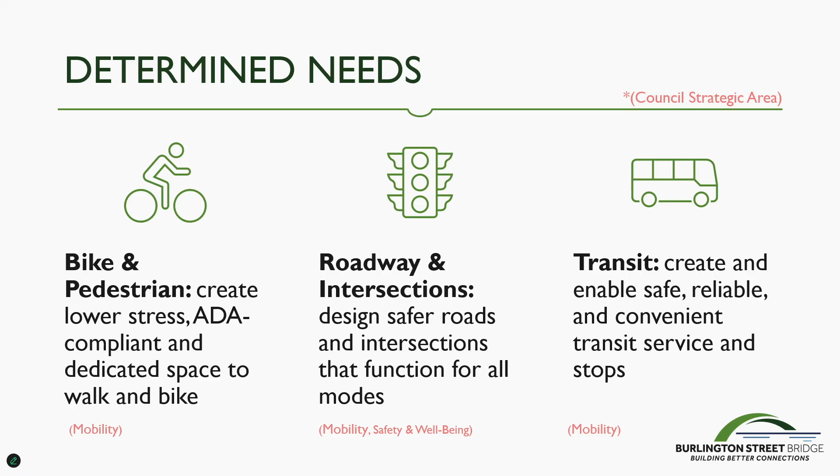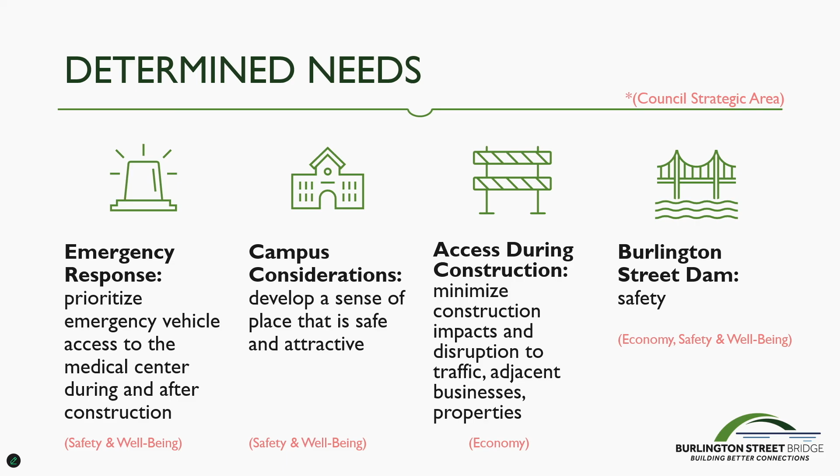For emergency response, we prioritized emergency vehicle access to the medical center during and after construction. Then developing a sense of place that is safe and attractive, minimizing construction impacts and disruptions to traffic, adjacent businesses, and properties. For the Burlington Street Dam, the primary focus and need was safety.

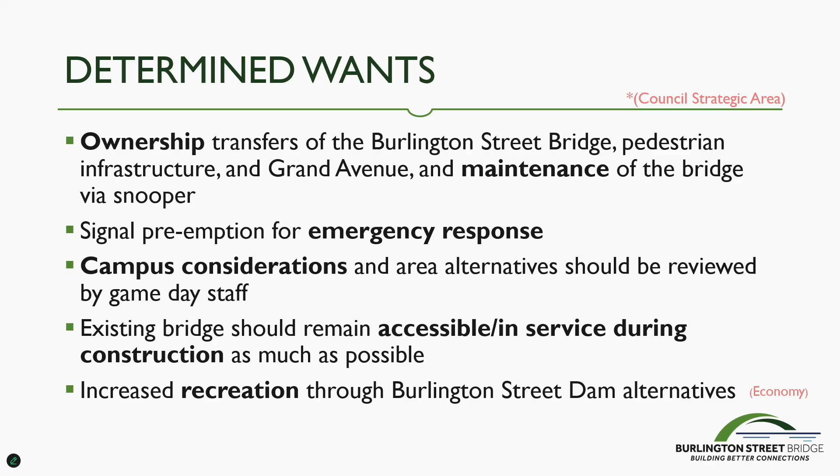Then for some of the wants: ownership, looking at design that would accommodate specific maintenance equipment, emergency service preemption at some intersections, having game day staff as part of the reviewers, having the Burlington Street Bridge accessible at all times, and looking at recreation through the Burlington Street Dam.

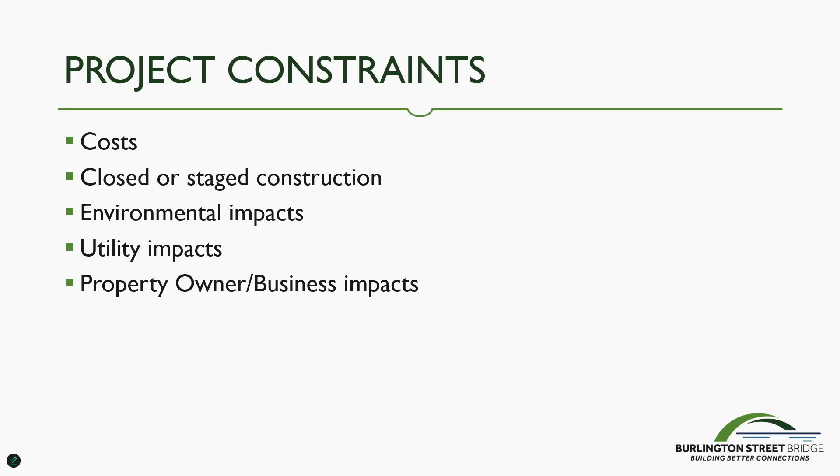And then, as always, some project constraints: cost, I think with every single project; looking at constructability, staged or closed construction for the bridge; environmental impacts; utility impacts; and property owner impacts. So it's a lot of information, a lot of needs.

So how do we advance into actual alternative development? We take all feasible opportunities within the region, then compare that with the technical feasibility from a design perspective, using state standards and current design standards, filtering out initially what won't work for the area. Then we take that and compare it against the project needs and filter out again. If it doesn't meet the project needs, it wouldn't get carried forward.

So out of the things that do meet the project needs, checking all the boxes, we meet with our advisory committee and discuss the positives and negatives of each alternative. The ones that had the greatest benefit were advanced. So that's where we are here, into our concept alternatives. We've already pre-filtered all of this to what is feasible and what meets the project needs.

Taking a closer look at each of these areas, we've divided this into 4 key areas. This allows us to take more of a bite-sized look. There are many different options that can be mixed and matched. We'll take you through every one of these 4 different areas in detail, starting with the first area, the Burlington Street Bridge. And I will hand it off to Jeff Morrow with Anderson Bogert.

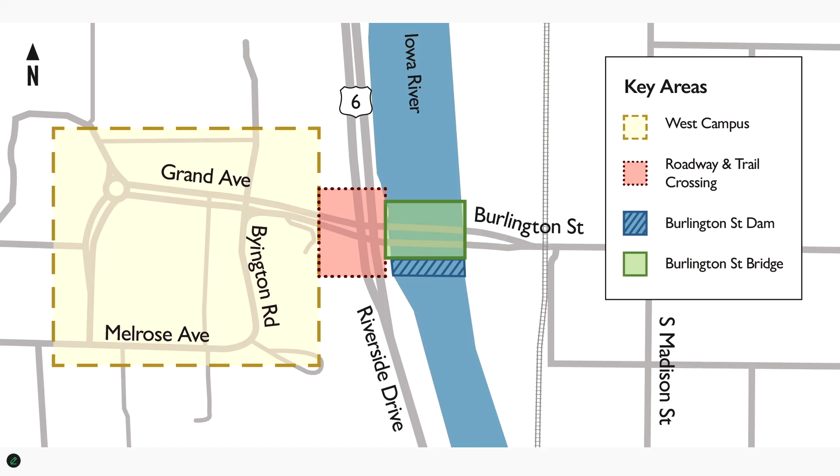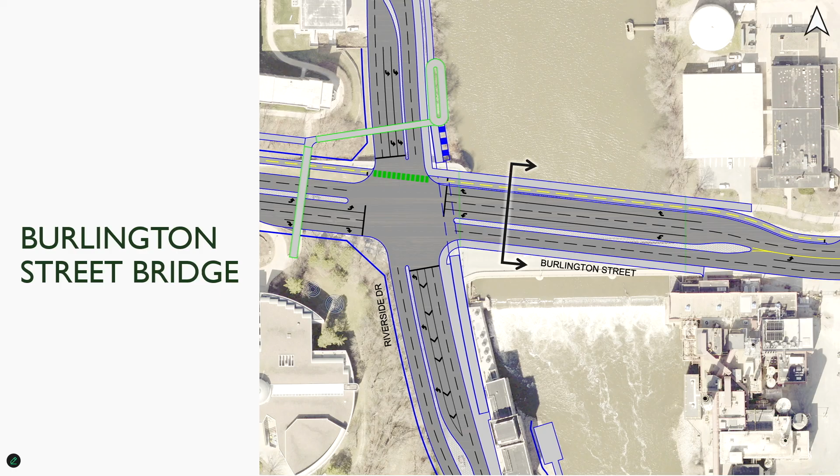All right, let's talk about bridges. This first slide is sort of an aerial view, like you're a bird looking down on Burlington Street Bridge. You can see this heavy line here, like we're going to take a big slice with a giant knife and cut that bridge and look at it on end. We'll be looking in the direction of the arrows, which is east.

So, as I said, we're looking at the bridge. The vehicles going away from you into the screen are going eastbound towards downtown, and the vehicles coming at you are going westbound toward the hospital. There's a median dividing traffic. All of the options have the same traffic lane arrangement for the vehicles.

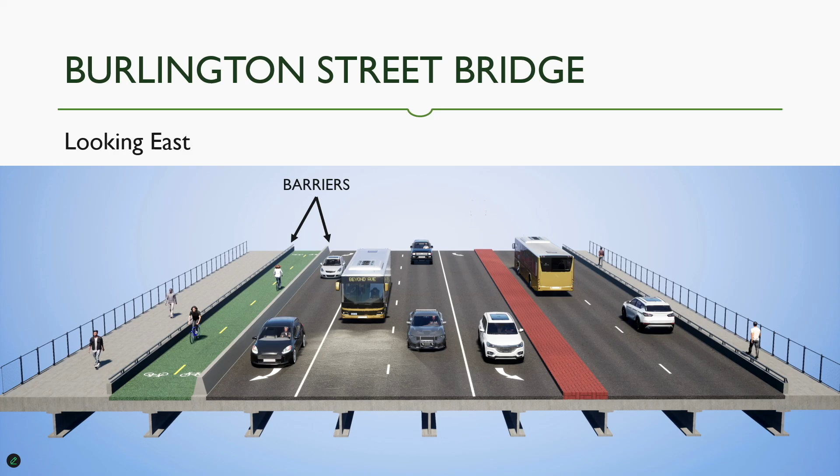That's going to be like, what, 1% of the time. 99% of the time, it's just going to operate as a bikeway and a pedestrian way. And then this option here just has very separated barriers between the three different modes of travel we've looked at. The pedestrians are separated from the bikes, which are separated from the cars.

And what that does is a couple things. One, it helps with these left turns so they can turn at the same time. Like today, you feel like you're going to run into the opposing traffic, so we're trying to fix that. We're also adding some more storage in the turn lanes because sometimes those kind of run out of storage. They fill up with cars or they get blocked.

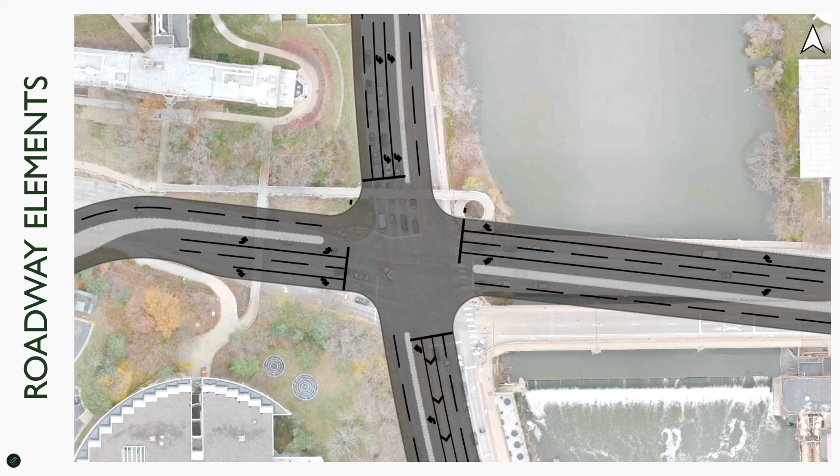We are moving Riverside over to the west to provide some more space between the river and the roadway, because we need space for pedestrians, a trail, and so forth.

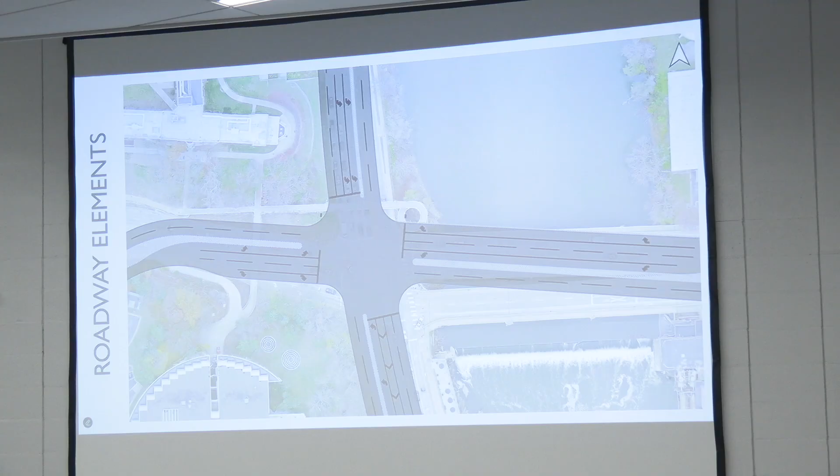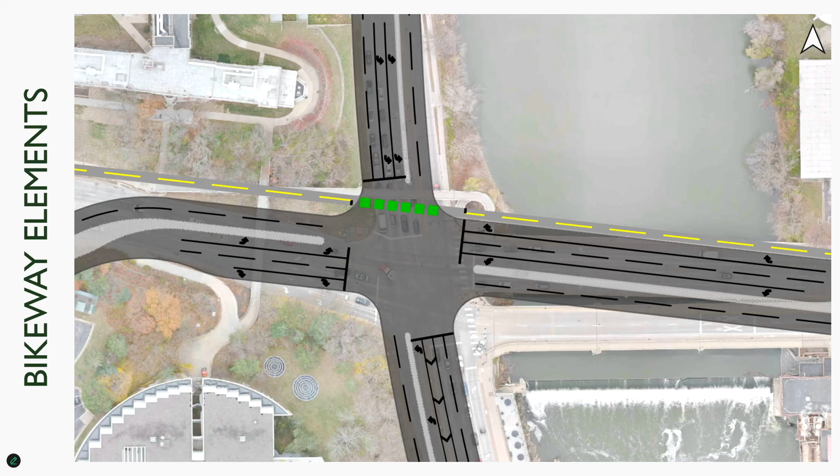So let's just add on the bicycle way. That's that same two-way bicycle way we talked about on the north side. These bicycles, if you're going east-west, will continue through the traffic signal across Riverside. They will also have the option to continue north or south on the trail along the east side of Riverside.

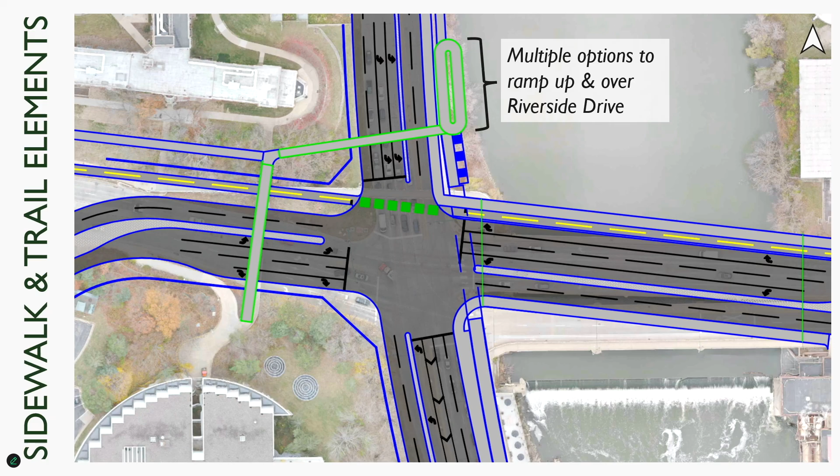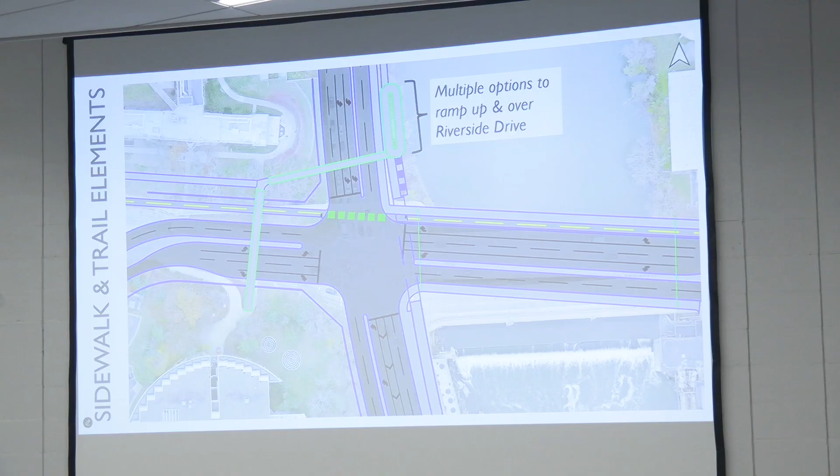And then we throw in the pedestrians, and this is where it gets pretty busy. For pedestrians, we're still looking at a very similar arrangement, crossing Riverside with an overpass and crossing Grand with an overpass, like you do today. We'll talk about some more of these different crossings, but we're going to focus on ways to get up to these overpasses in these next few slides.

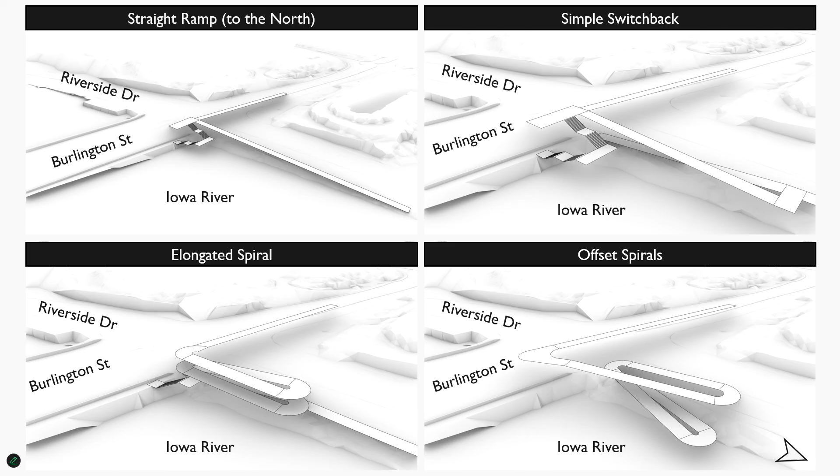So we looked at 4 options, and I'll go through each one in more detail. We've got just a long ramp that goes north. You're kind of looking southwest, so the river's here, campuses or the dorms are up here, hospitals up here. So you're looking at a long ramp that goes on the north on Riverside.

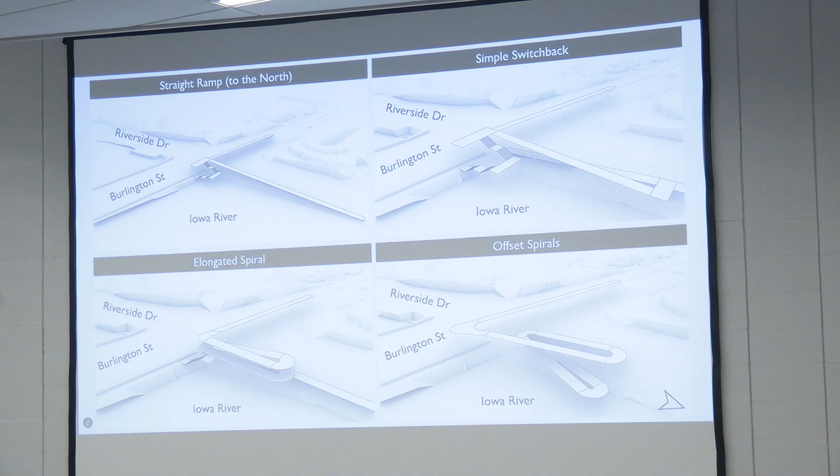We also looked at a switchback ramp, so still the same length of ramp, but just doubling back on itself. And then spirals, kind of like what you have today, except the spirals that are out there today are not compliant with the Americans with Disabilities Act. So these would stretch out that spiral and get you those more gentle slopes.

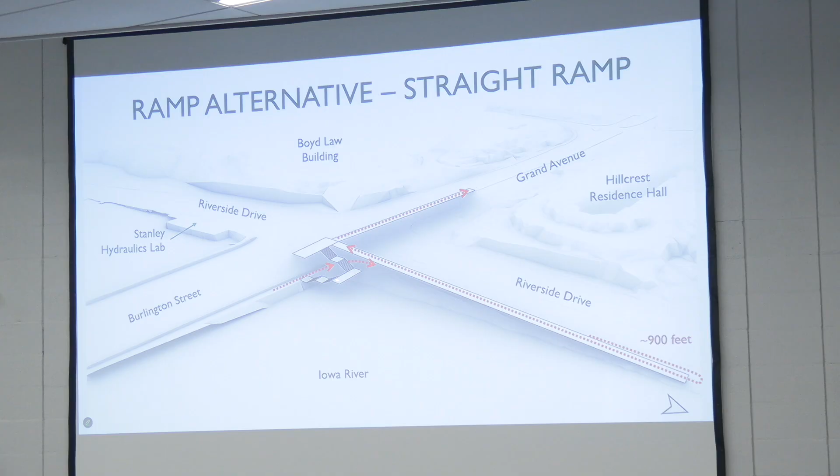So let's look at that first one, the big long ramp. If you are traveling on the north side of the bridge, Burlington Street, and you want to cross Riverside Drive, if you're able, there would be some sort of stairway to get up, and then you would go across just like you do today. Or if you need ADA accessibility, you would just be at grade, you'd take a right, you'd walk on the sidewalk along Riverside about 450 feet, then make a U-turn and go another 450 feet up and then cross.

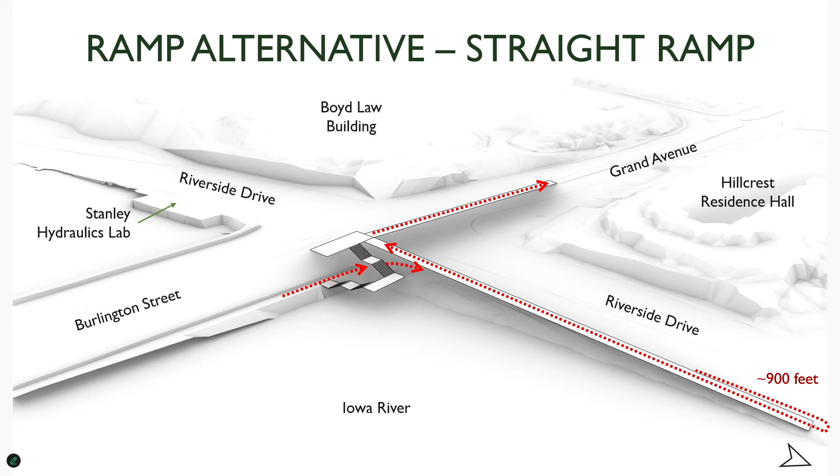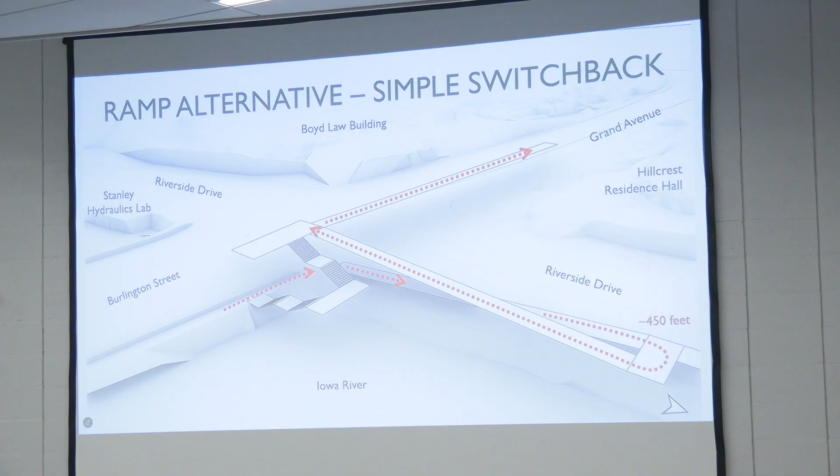So that's where that 900 feet is, it's 450 feet each way. 450 feet is about a long block on a street, so in a neighborhood. So then we look at the folded ramp, and the advantage of this is it cuts the distance in half. You're just doing the ramp up and making that U-turn, so you're just doing 225 and 225 and you're up. Same thing, if you're able, you can use the stairs and get up and cross.

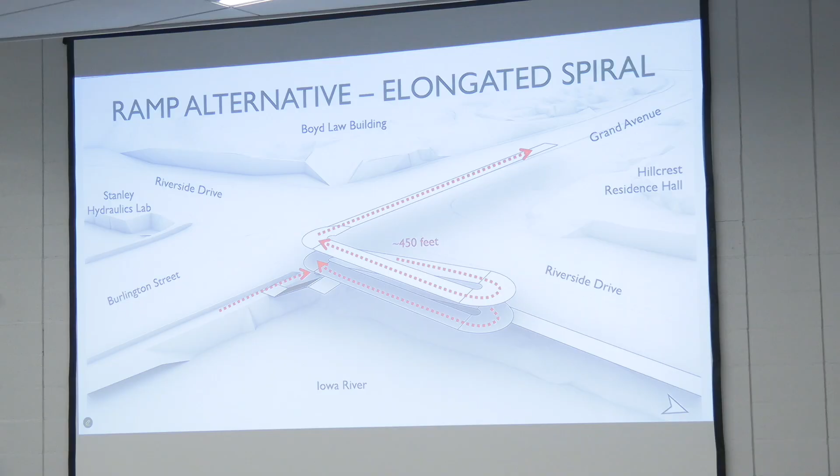Then we've got the spiral, which again, you've got that today, except this is compliant. We may have some stairs that'll get you partway or all the way up to the top. Or if you need that ADA accessibility, you just get on the bottom of that ramp and you take 2 revolutions to get all the way up, and then you go across.

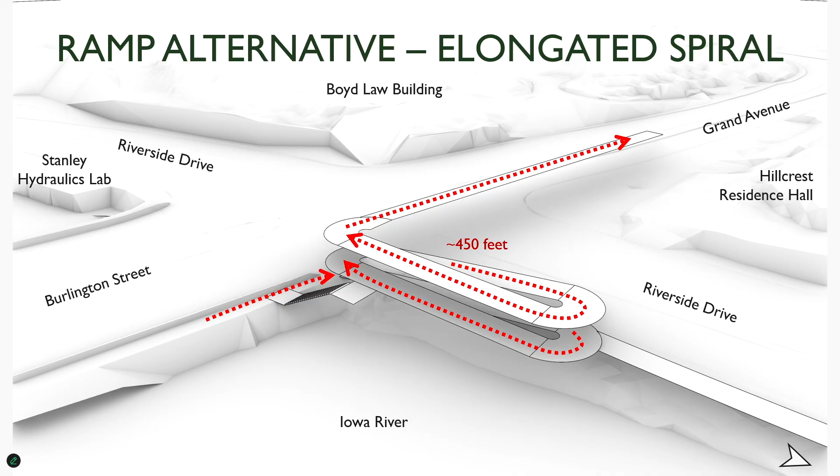Last one, this is what's called an offset spiral. Same idea as a spiral, it just has some different directions on it. This gives you opportunities for better views, and kind of gives you the impression you're not really going as far. It's still the same distance, 450 feet like the other 2, 3, and 4, but it gives you different perspectives as you're coming up — a view over the river and then back, and then maybe a view down along the trail and back up.

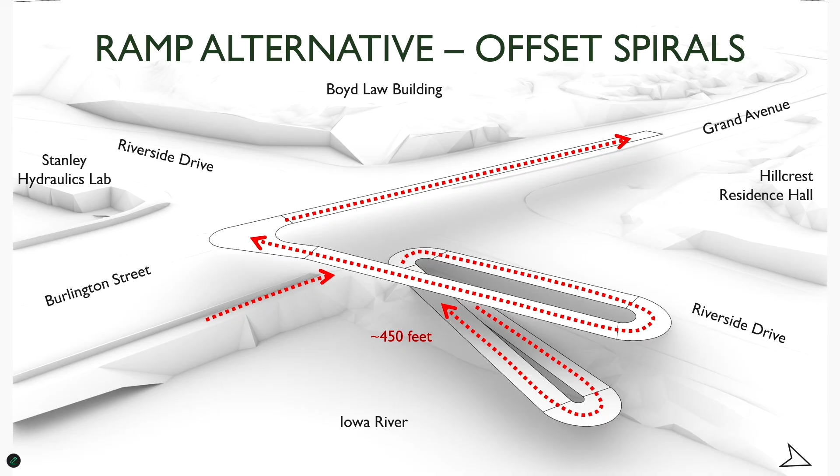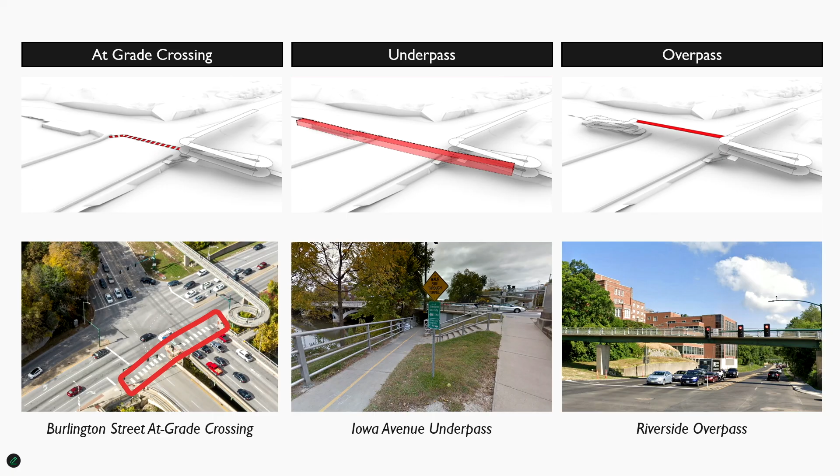All right, so that's how we get across Riverside. Let's talk about crossing Burlington Street. There's basically 3 options that we looked at. The first one is at grade. That's what you have today. There's a crosswalk, you cross with the signal. And then we're showing that elongated spiral, but essentially the same concept as what we have today.

The other way is to put an underpass underneath Burlington Street. So it would be like what you have at Iowa Avenue. Again, not an unusual concept.

It is here. And then the third one would be an overpass. We talked about all the different ways you can get up. We would do that on one side, go across, overhead. And then probably on this side, since we're more constrained for space, it probably would be a spiral that's more compact, but it wouldn't have to be. So those are the different crossings.

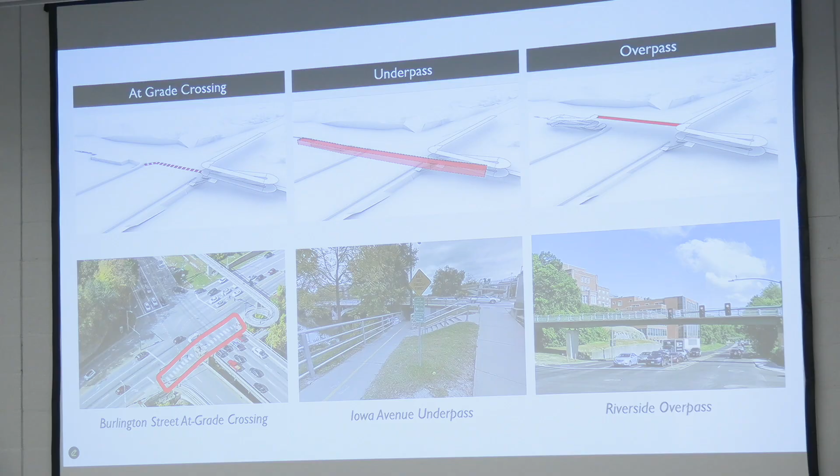I think with that, we're going to start looking at West Campus alternatives with Jacob Weiss. Thank you.

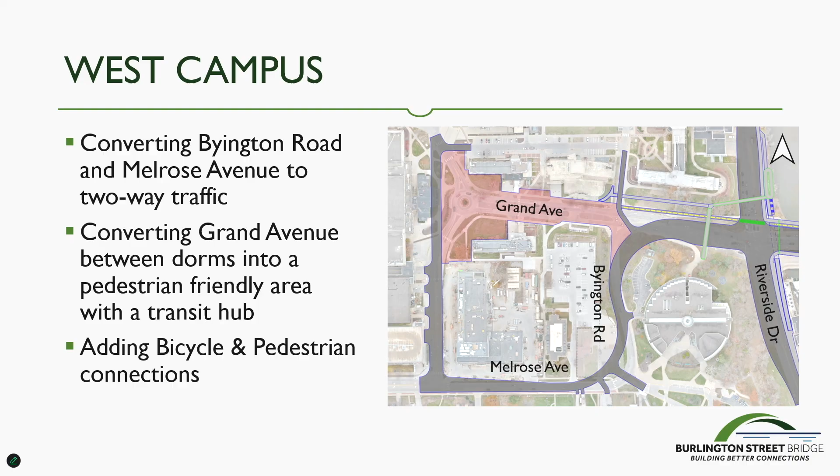All right, so Jeff went over everything, kind of the east, both the bridge and the intersection with Riverside. We're going to head a little bit further west. You can still kind of see some of those crossing options that Jeff was mentioning earlier, kind of on the right side of the figure there. But for West Campus, we want to talk about 3 main bullets, and I have some slides that break down these 3 bullets. The first is converting Byington Road and Melrose Ave to 2-way traffic. The second is converting Grand Ave to a pedestrian-friendly area between the dorms there, with a transit hub and some amenities for students to get safely on and off the bus. And then lastly, adding some bicycle and pedestrian connections. I'll break these down in the next few slides.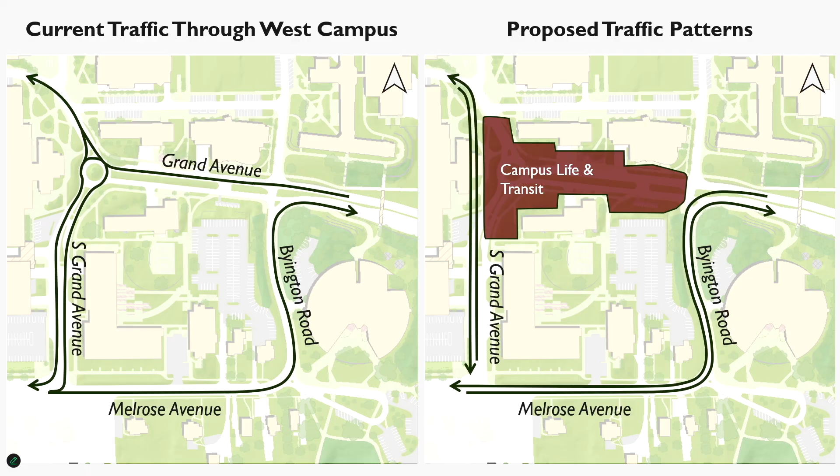You kind of see in the red area that we talk about that campus life and that transit area. That would also provide access for the existing dorm facilities to get shipments, so we have specific times for folks to pick up and drop off things that need to be delivered to those dorms as well. Here's that in CAD.

So essentially, we're showing the 2-way Byington Melrose. Again, that's what you see with those 2 arrows. We're still determining the number of lanes for that, but we have a board over here with some more details that I can talk to you about after this presentation if you want to dive into what options we're considering.

In that red area along Grand Ave, that gives us the opportunity to have more of a pedestrian mall, right? We'd have opportunities for students to walk wherever they want to in that area because there isn't a ton of traffic going through there anymore. They can walk to the bus stop, get off the bus, or have different amenities throughout that Grand Ave kind of pedestrian-friendly area.

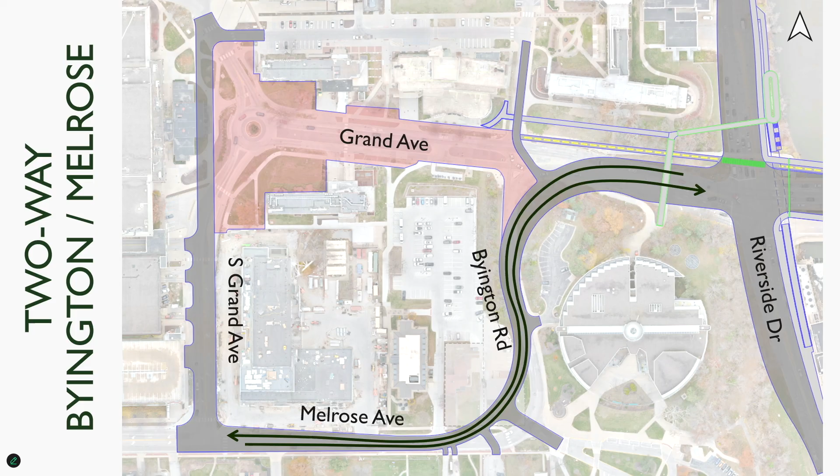In terms of transit hub considerations, there are a lot of options we've looked through, but the main two we're leaning towards - there can always be others that pop up as we continue through these early planning stages. Essentially, the buses would follow the two-way Byington/Melrose traffic, get over to South Grand, head up to that pedestrian mall area, pick up and drop off students, head back to Melrose, and then head on their way. So those buses would follow the arrows I've drawn along Byington and Melrose.

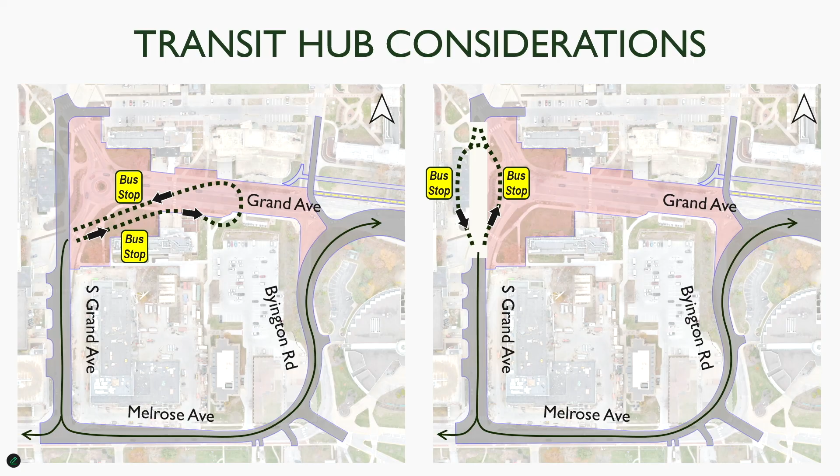The couple options we have along Grand Ave: we could orient the buses east-west to be picked up in that pedestrian-friendly space, or we could keep them on South Grand and make a larger roundabout radial movement for the buses to come up, loop around, and head back south. We're still determining what would be best, and we'd love to hear your input at the board after the presentation.

And lastly, bike and ped connections. We know today those bike lanes that go across the bridge stop at Riverside, and then you're stuck in with traffic. Jeff mentioned we are looking at a two-way bikeway on the north side of Burlington, which would stay on the north side along Grand Ave.

Once we get to the Byington connection, that's where we would determine whether we go Route A, Route B, or both. Route A would get students to their dorms or maybe bike parking. Route B could be for folks traveling through the campus area. We're still determining the best route for those bikes, but we definitely want to include and remove any gaps in the bike system through West Campus.

Everybody in the law building would go across the overpass, correct? That is the plan.

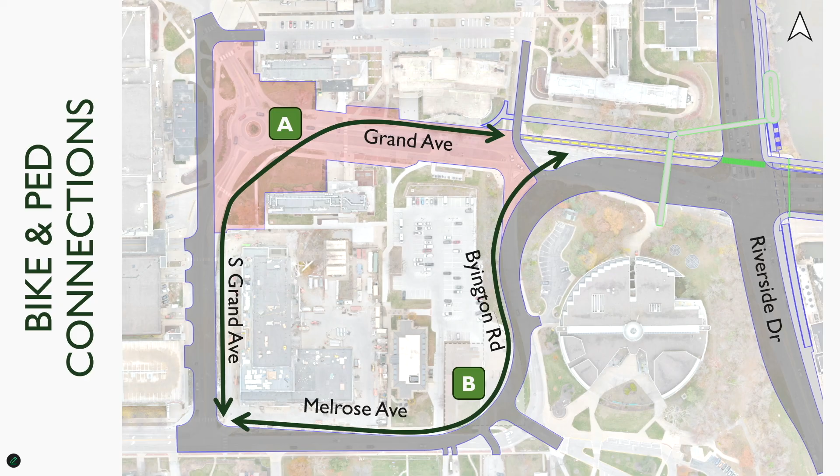We're also looking at some potential crossings on Melrose or Byington. We're still determining that.

And lastly, I'm going to drop it off to Mike for the dam alternatives. Thank you, Jake. So some of the Burlington Street dam alternatives that were advanced, at a minimum, would include improved ability for river recovery. All the options would enhance what's there today. Since it doesn't quite exist today, it's difficult to get to, so we would improve that ability for river recovery.

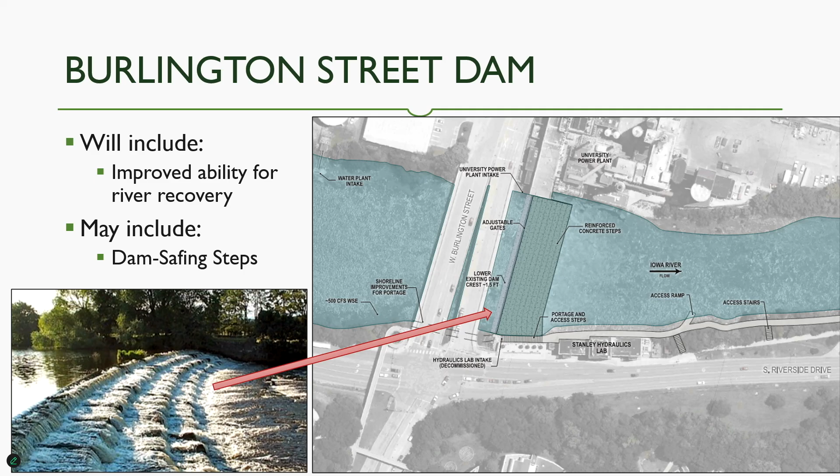Some of the options that might be included moving forward with our alternatives is extra dam safing. One option shown here is dam safing steps that remove the current at the current roller dam, so if you go over, it's not fatal.

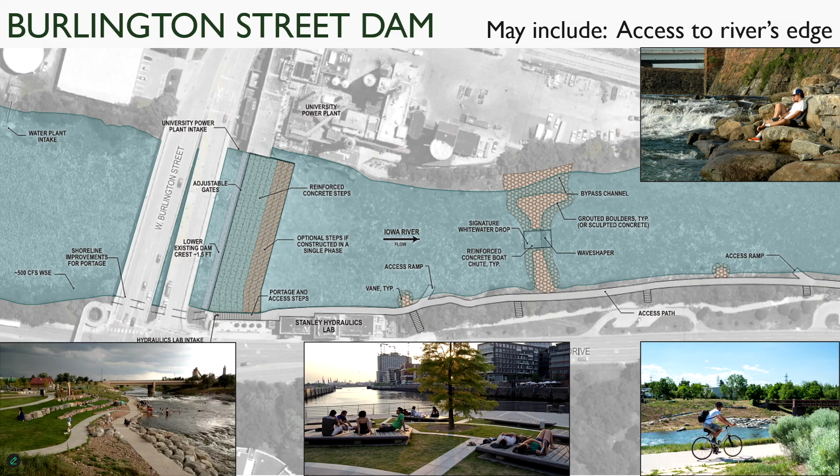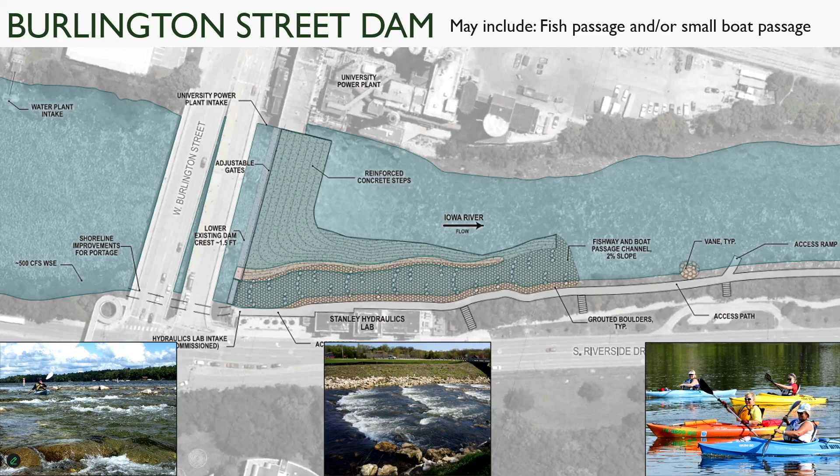Some other alternatives that might be advanced include access to the river's edge. Based on the precedent imagery here, that can take a lot of different forms, all the way up to the river, short of the river, or anywhere in between. Then we have the ability to include a fish passage or small boat passage, and then the ability to swim or wade in the water. And lastly, surfing, whitewater recreation, or tubing.

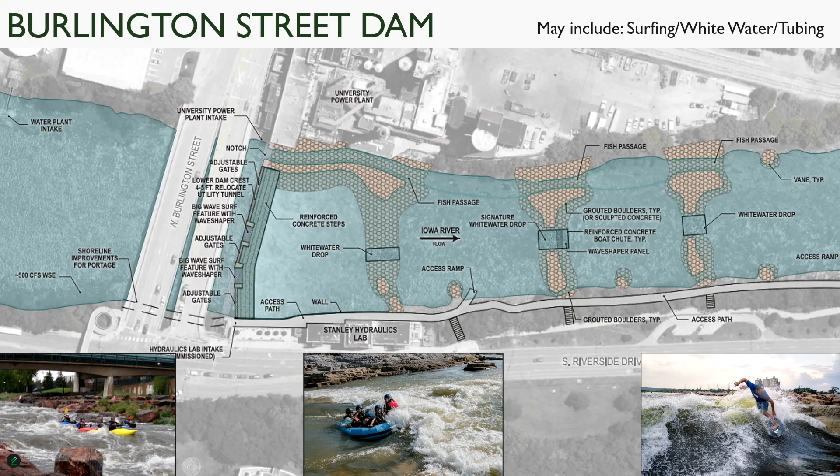Any of those recreation options that I showed can be mixed and matched - all can be included, some, or none. So it's the whole range there for dam recreation and dam safety improvements.

So the last thing we wanted to touch on, which is very important, is project construction impacts. Construction is not going to be fun - it's going to be very disruptive and painful at times. We are considering that with every alternative. We need to look at constructability as well, to make sure that whatever we're selecting can actually be constructed. Part of that involves phase considerations, so we have different timeline considerations with those.

The option up at the top allows Burlington Street Bridge to stay open pretty much at all times. I think at a minimum, we would have a bi-weekly closure just at night for material deliveries. So this is just the general day-to-day sense. So the first option, again, bridge open for traffic and pedestrian use.

Then the second option that can shave about a year off that construction timeline is summer critical closures, closing access across Burlington Street just for the summer months. And then lastly is the full closure option. Very disruptive, but it can shave that construction timeline down quite a bit.

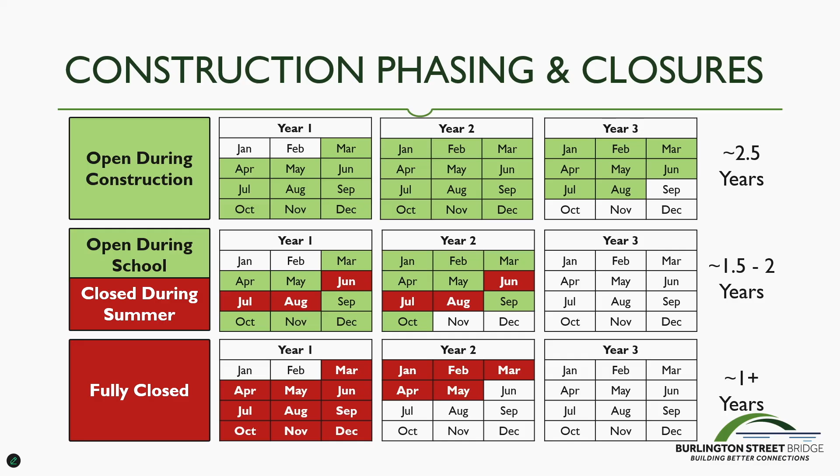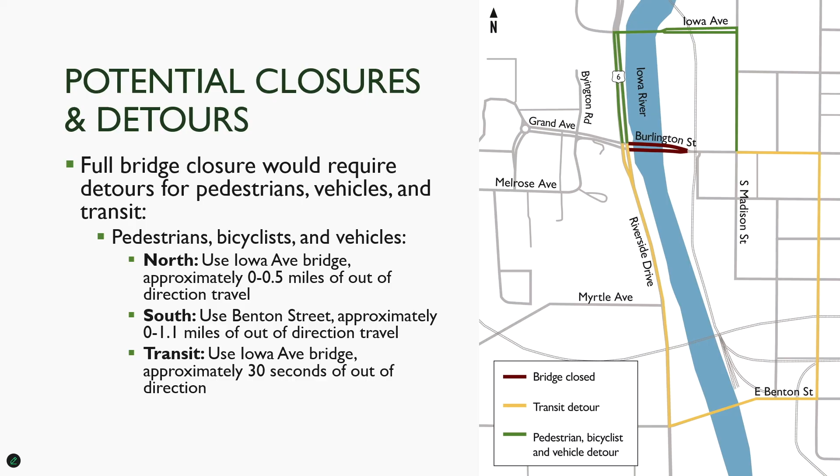So all of those are being evaluated, and partnered with that is what the detour looks like for each of those options. Just to highlight the nearest detour options down Iowa Avenue - there's constraints with that, there's height restrictions with the rail bridge that goes over it. And down at Benton Street, Iowa DOT is working on a bridge project as well, so we wouldn't want to close Burlington Street Bridge while Benton Street is also closed. So we have kind of the out-of-direction travel there, but just to note again, we know construction is going to be a headache, so we're trying to look at options there as well.

And with that, I will kick it back to Kristen.

All right, I'll go ahead and wrap us up quick, and then we'll have some closing thoughts, and I'll explain some of the activities we have that we'd like you to provide your feedback through. So first things first, next steps. After our public meeting, we really do take your feedback into consideration. So please spend the time to talk with our team members, let them know your thoughts, participate in our activities. Take that survey - that's not the last time I'll mention it during wrap up.

And then we use that to refine the alternatives. Once we do that, the project team determines the final preferred alternatives with our technical advisory committee. Justin had mentioned some of our project partners with Iowa DOT, et cetera, so we'll do that within the next month or so. And then we will present that final preferred alternative to the stakeholder working group that Mike mentioned earlier. We've met with them throughout the course of this project development. We want to close that loop with that group, and we'll do that in November.

And then we will come back to this room during a city council meeting and present the final preferred concepts for acceptance to city council.

So I'm going to let Justin wrap us up, say some closing words, and then I'll talk about the activities real quick.